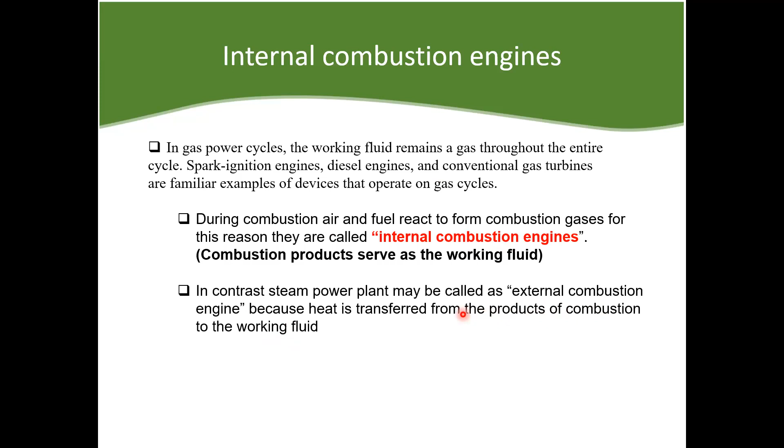What are examples of internal combustion engines? We have the two-stroke cycle and the Otto cycle, or the gasoline engines. For the two-stroke cycle, it's one power stroke for every two strokes, with the piston moving up and down. It's less efficient, and we commonly see this in motorcycles, chainsaws, and lawnmowers, where the engine is small.

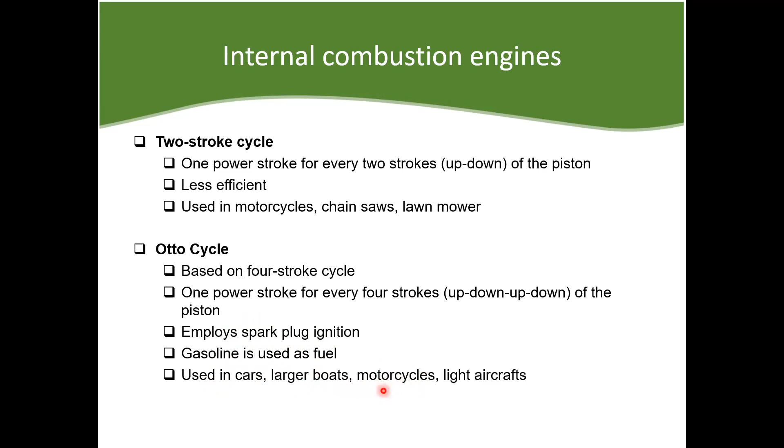On the other hand, the Otto cycle is based on a four-stroke cycle, so unlike the two-stroke, this time there's one power stroke for every four strokes. It uses a spark plug, a part you may have heard about in a gasoline car. Gasoline is used as fuel, and we commonly see this in cars, large boats, large motorcycles, and light aircrafts.

This is an ideal Otto cycle. By the way, when we're talking about an ideal Otto cycle or an ideal diesel engine, which we'll discuss later, we call that an air standard power cycle. This refers to the ideal counterpart or the ideal cycle. The cycle consists of four internally reversible processes. Let's look at the TS diagram and the PV diagram at the same time.

Steps 1 to 2 is the isentropic compression. Isentropic is a vertical line on the TS diagram. On the PV diagram, this is where isentropic 1 to 2 occurs. So the first step is isentropic compression. Air is the working fluid, and we assume that it's an ideal gas.

Step 2 to 3 is constant volume heat addition. On the TS diagram and PV diagram, since volume is on the x-axis, this is a vertical line. In the diagram, this is the step of constant volume heat addition, so the volume doesn't change. The piston remains at the same position, and we add heat.

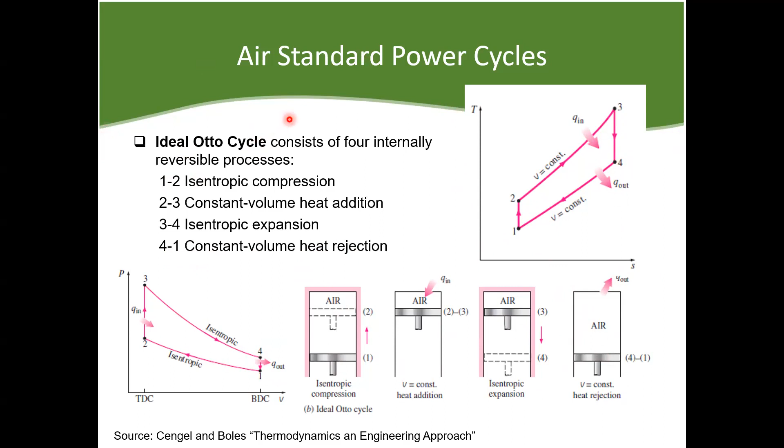So when we look at the thermal efficiency, by the way, this slide is from Ma'am Rowie's slide. Basahin nyo rin yung handout or slides ni Ma'am Rowie. May mga additional information doon na hindi makikita sa current slide. So credits to Ma'am Rowie for the slides.

Thermal efficiency of an air standard Otto cycle. Again, air standard Otto cycle, we're referring to the ideal Otto cycle. Remember our equation of the thermal efficiency: it's the work net over the QH, or the Q in, the heat absorbed or heat added to the system.

So we can adapt that in our Otto thermal efficiency equation. Remember, yung QH natin or yung heat addition, saan ba nangyayari? Saan step? Sa D to A, so step D to A in the diagram is the constant volume heat addition.

So we replace the denominator with Q sub DA, and our work net is actually Q DA plus QBC. But remember that yung QBC negative yung value niyan. So we just use positive, pero this itself would have a negative value kasi it's the heat that is rejected from the system, or going out the system. So the addition ng dalawa yan would compose the work net.

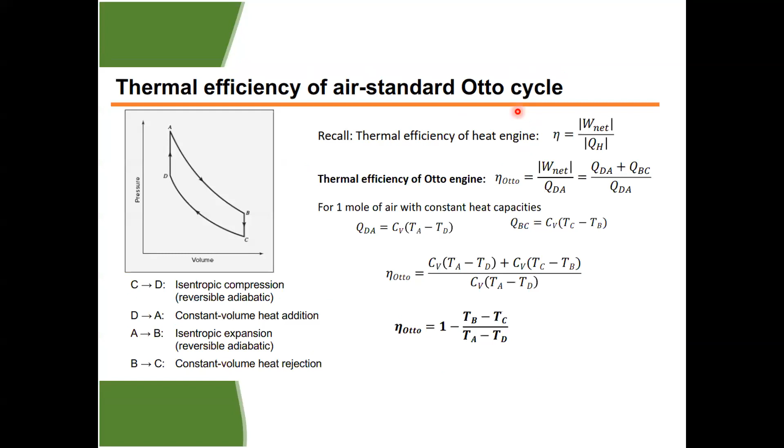And it's greater than 1 because VC is higher, so nasa numerator yung higher volume. So what if we want to express this in terms of the compression ratio? Let's derive the equation for that. Since our assumption is the air is an ideal gas, we can use the ideal gas equation.

We substitute yung expressions ng T into the equation. So substitute mo yan, substitute mo yung TC, and so on and so forth. Simplify the equation. Since this is our compression, we define this term VC over VD as our compression ratio. Substitute lang yung R. Now itong term, let's focus on this term, itong mga pressure na term na to.

Remember that may two adiabatic reversible steps. And for a closed system that's adiabatic, this holds true: PV raised to gamma is constant, where gamma is the ratio of the specific heat at constant pressure and constant volume. Remember that's from ChE 142. So adiabatic and reversible closed system, PV raised to gamma is constant.

So therefore, PA times VA raised to gamma is constant. And because VD is equal to VA, I replace VA dito with VD. The same goes for this term.

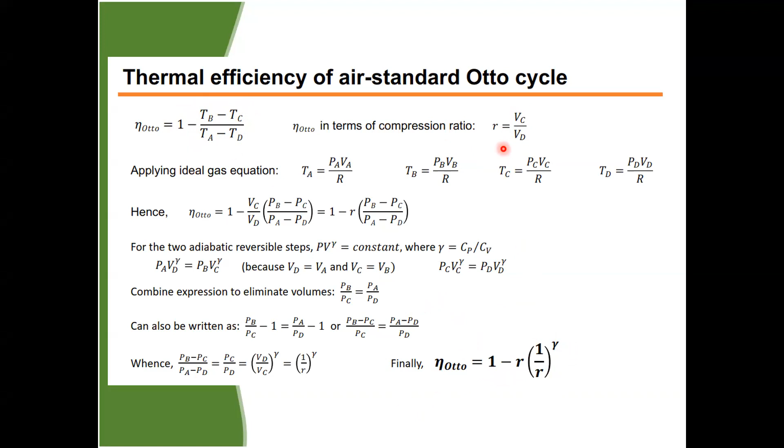So what is the significance of the compression ratio? The higher the compression ratio, the higher the efficiency, as shown in the figure. But when a higher compression ratio is used, the temperature of the air-fuel mixture may rise above the auto-ignition temperature. So what is the auto-ignition temperature? It's the temperature wherein your fluid automatically ignites, without needing a spark, it will ignite on its own.

And this happens during the compression process. In an actual Otto cycle, there's a spark plug, right? But if the temperature is too high, the spark plug isn't needed, it auto-ignites. And that phenomenon is called engine knocking or engine knock. I'm not sure if you've experienced this, probably in old cars, but engine knock in spark ignition engines cannot be tolerated because it hurts the performance and can cause engine damage.

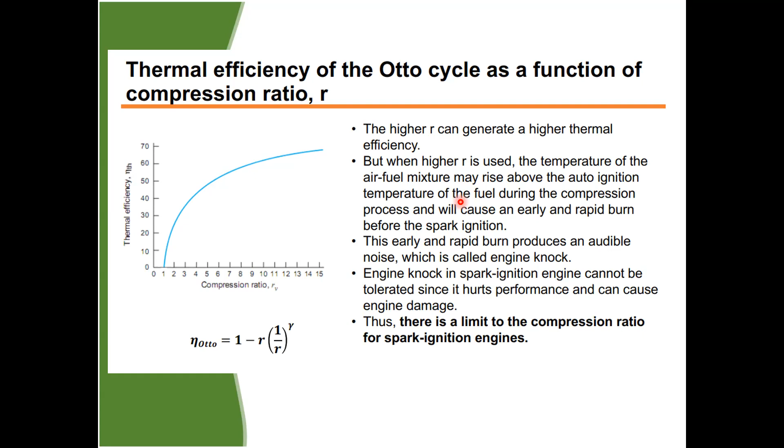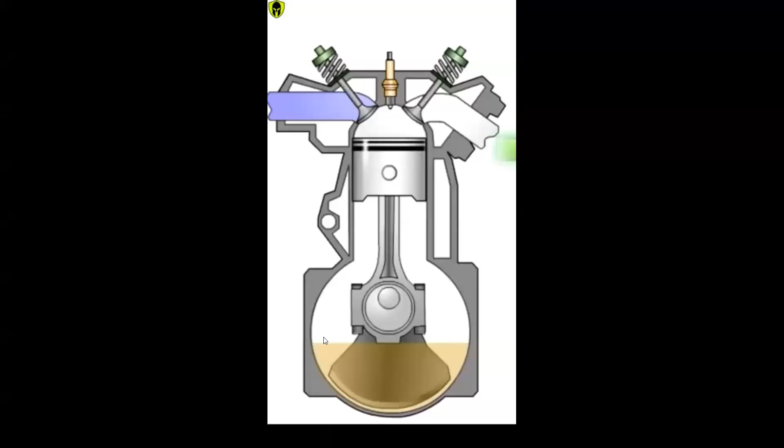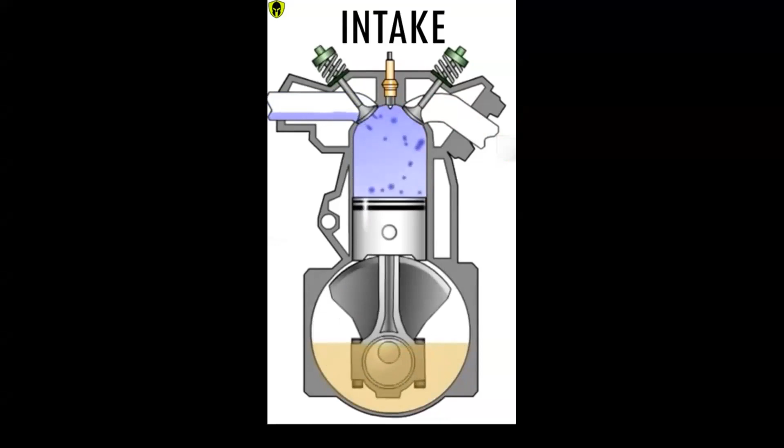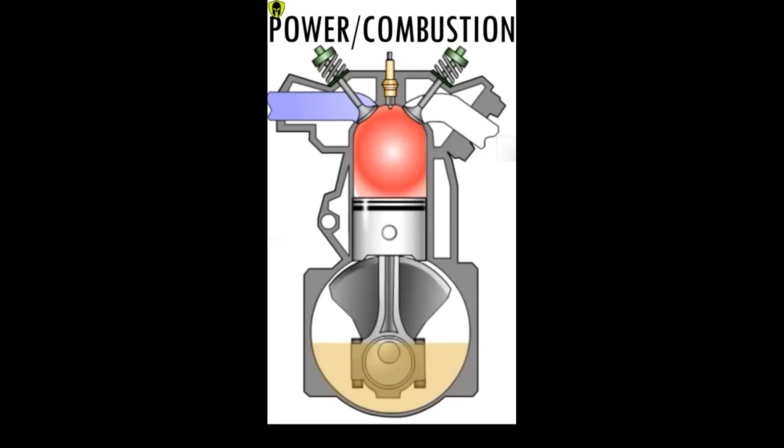How do car engines work? The internal combustion engine uses small controlled explosions inside the combustion chamber which push the piston down. The piston's reciprocating movement rotates the crankshaft to power the vehicle. All modern engines are 4-stroke: intake, compression, power and exhaust. During the intake stroke, the piston moves down, and at the same time the intake valve opens and the air and fuel mixture rushes into the chamber. Next is compression, in which the piston moves back and the intake valve closes, compressing the air and fuel mixture. Then comes the power stroke, in which the compressed air and fuel mixture is ignited using a spark plug, resulting in a controlled explosion that pushes down the piston with force. The last stage is the exhaust stroke, at which the exhaust valve opens and all the burned exhaust gas exits the chamber. The intake and exhaust valves are controlled by camshafts.

The camshaft is connected to the crankshaft. This whole process happens thousands of times in a minute.

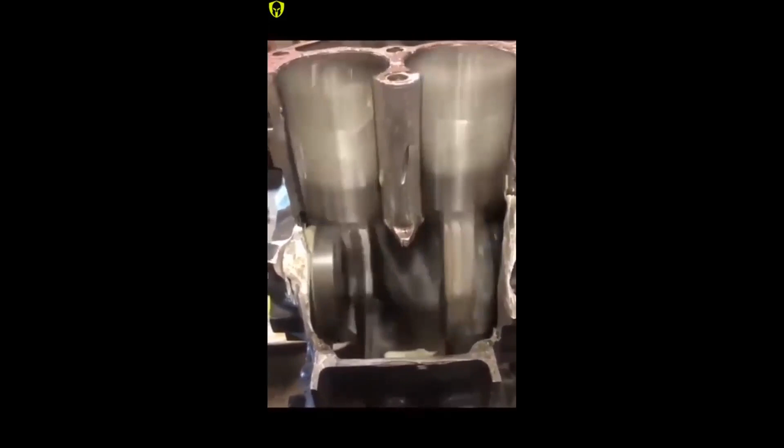So that's how an actual Otto cycle or Otto engine works. Let's proceed.

Next we move on to the diesel cycle. The ideal diesel cycle is also an air standard power cycle, like the Otto cycle. It's based on a four-stroke cycle and employs a compression heating ignition system. In gasoline engines, we have a spark plug, but in diesel engines it's replaced by fuel injection, and only air is compressed during the compression process. Diesel engines are used in automobiles, heavy trucks, heavy equipment, and electric generating plants.

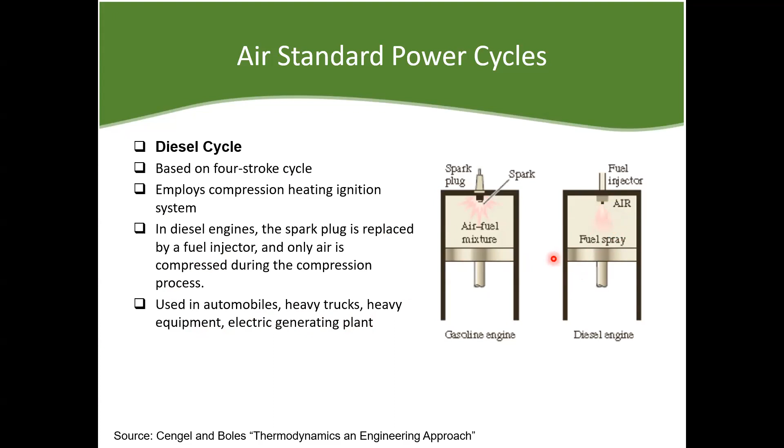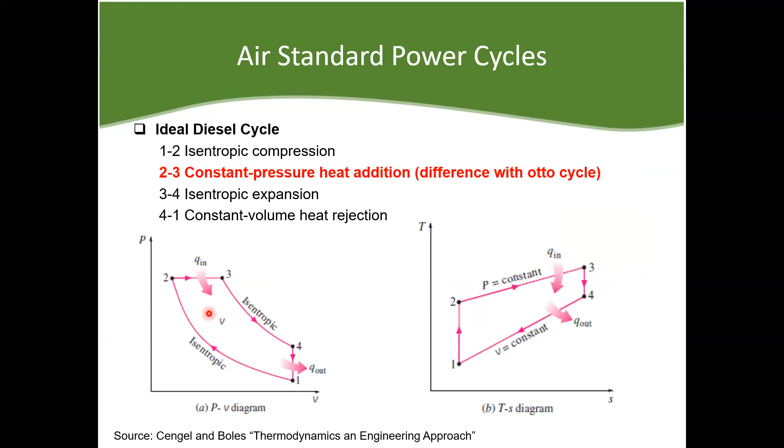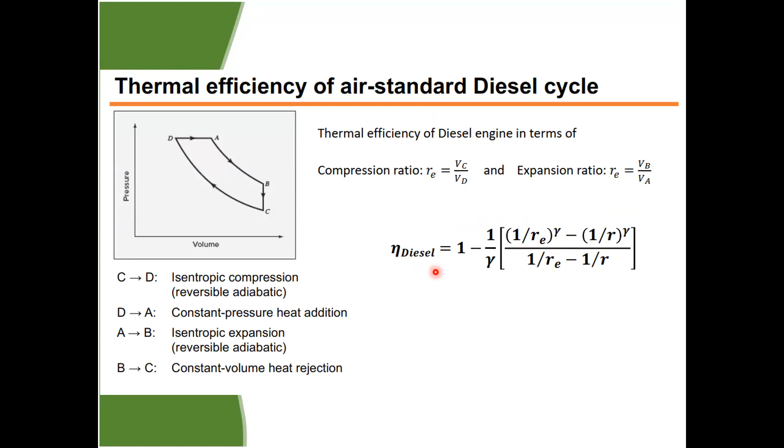And the efficiency of the ideal diesel cycle, or the air standard diesel cycle, is given by this equation. Again, assuming CP over CV is equal to gamma, and PV raised to gamma is constant, or the specific heats are not a function of temperature.

Before solving sample problems, let's finish the discussion first - the sample problems will be in a different video. Now we move on to the Brayton cycle.

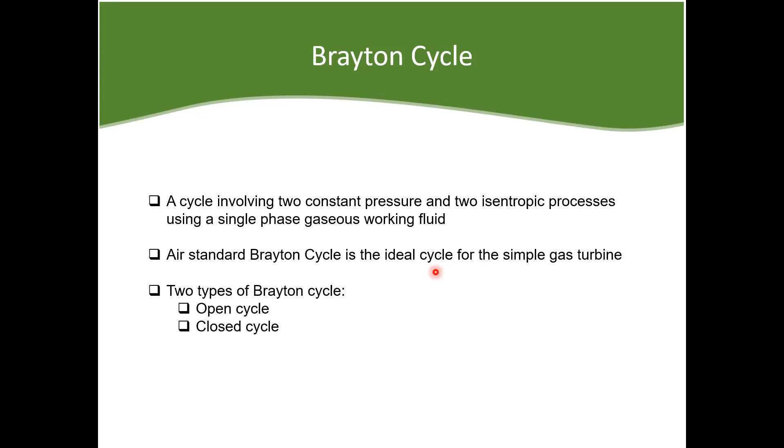It was previously called gas turbine engine, and it has three components: a gas compressor, a burner, and an expansion turbine. The cycle involves two constant pressure and two isentropic processes using a single-phase gaseous working fluid. We're still discussing a single-phase gaseous working fluid, whereas previously, in steam power plants, the fluid changes phase.

So the air standard Brayton cycle is the ideal Brayton cycle. Again, the term air standard refers to the ideal cycle. There are two types of Brayton cycles: the open cycle and the closed cycle.

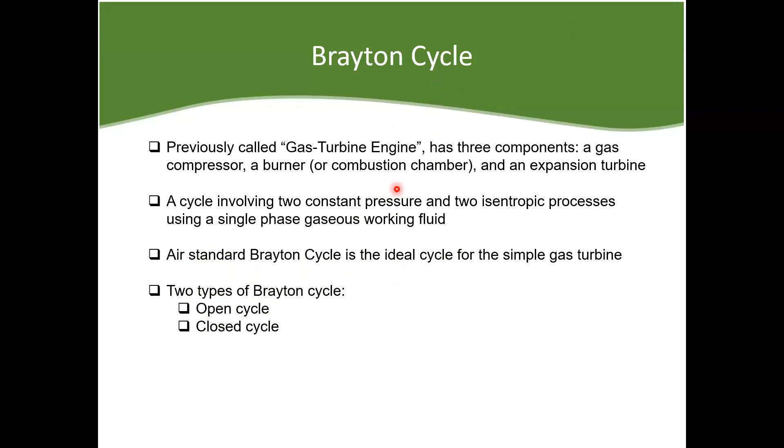First, let's discuss the Brayton open cycle. Fresh air at ambient condition is drawn to the compressor where its temperature and pressure are raised, and then the high pressure air proceeds into the combustion chamber with fuel, and the fuel is burned at constant pressure. The resulting high temperature gases enter the turbine where they expand to atmospheric pressure while producing power, or work. The exhaust gases leave the turbine and are not recirculated. Some part of the work of the turbine drives the compressor.

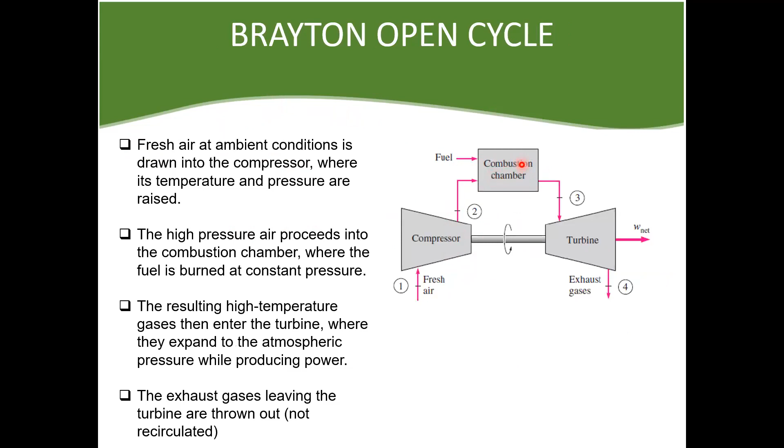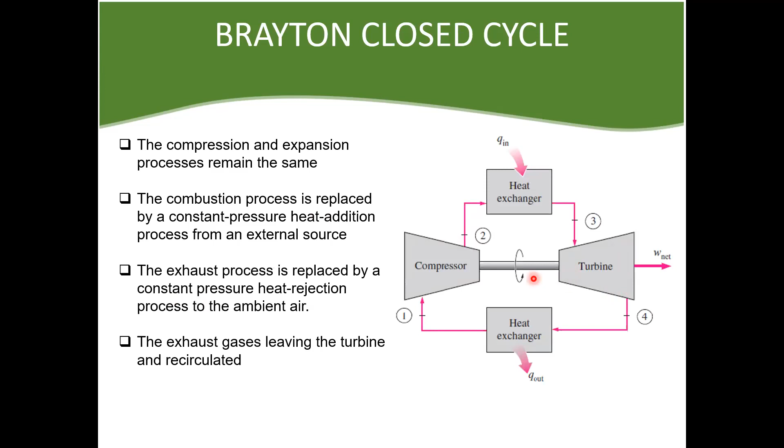On the other hand, for the Brayton closed cycle, the compression and expansion processes remain the same, but the combustion process is replaced by constant pressure heat addition from an external source - previously it was the air itself entering the compressor that was mixed with fuel. For this one, there's just a heat exchanger as the external source. Then the exhaust process is replaced by constant pressure heat rejection to ambient air, so there's a heat exchanger here too. The exhaust gases are recirculated, and again part of the work produced by the turbine is used to drive the compressor.

So if we want to calculate the efficiency of the Brayton closed cycle, we can use this equation. We start with the efficiency equation, 1 minus QC over QH, where QC is the heat rejected from the heat exchanger after the exhaust, and QH is the heat added in the heat exchanger after compression. Remember, both heat exchangers are constant pressure processes.

So this equation holds true: Q equals Cp delta T, where Cp is the constant pressure specific heat. We simply replace that with Cp delta T for both steps, then cancel out the Cp and rearrange, taking out T1 for the numerator and T2 for the denominator.

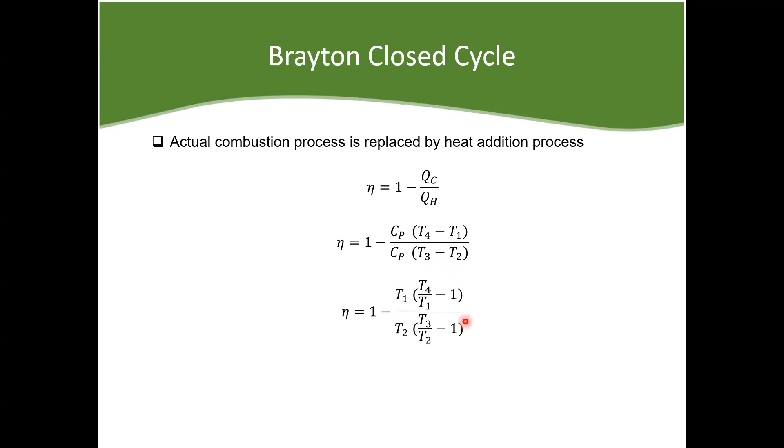Since process 1 to 2 and 3 to 4 are isentropic, refer to the TS diagram and PV diagram. P2 is equal to P3, and P4 is equal to P1. This is for the Brayton closed cycle, and this equation holds true.

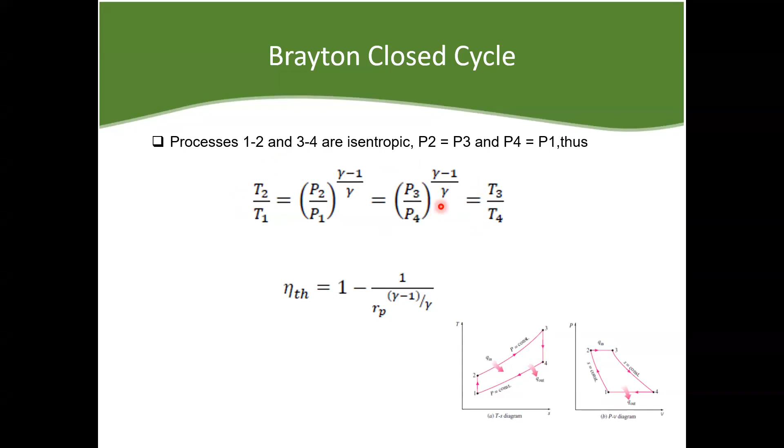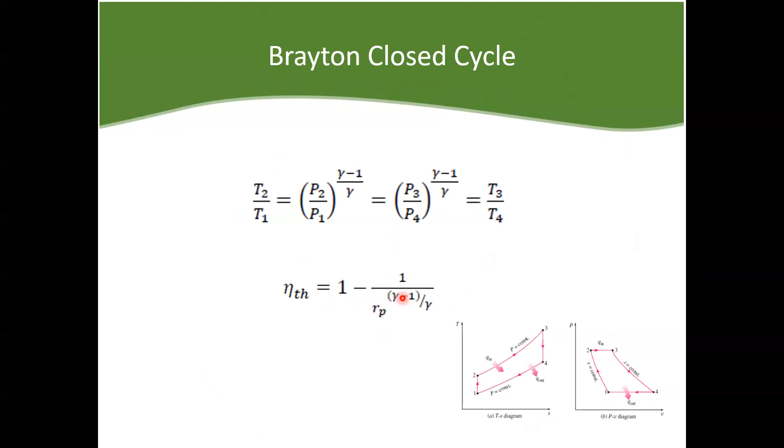Replacing the terms in our previous equation, we can then derive the equation for the efficiency of an ideal Brayton closed cycle. So this is the equation for the ideal Brayton closed cycle.

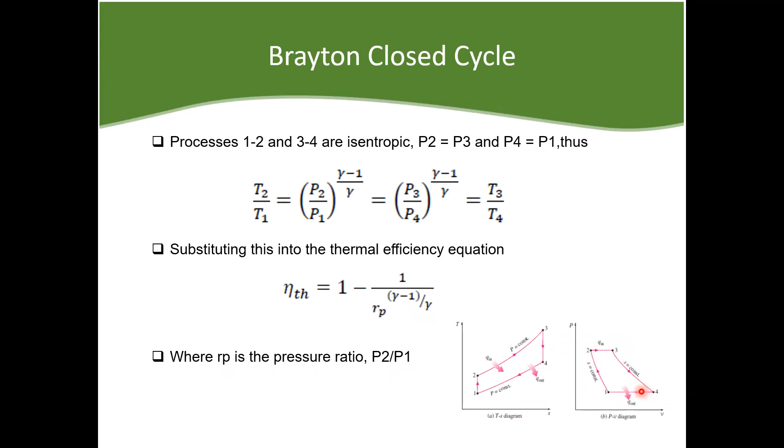Now the term P2 over P1 is called the pressure ratio. So P2 over P1, or P3 over P4, since processes 1 to 4 and 2 to 3 are isobaric, constant pressure.

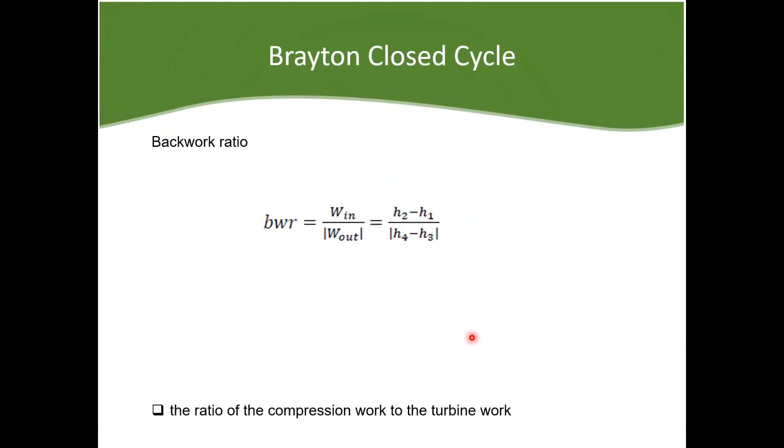We also have another term called the backwork ratio. What's the backwork ratio? It's the ratio of the compression work to the turbine work. Remember, in the Brayton closed cycle, part of the work of the turbine is used to drive the compressor. So we take the ratio of the work required by the compressor over the work produced by the turbine. Expressing that in terms of enthalpy, we have the backwork ratio. The usual range of the backwork ratio is 40 to 80% for the Brayton closed cycle.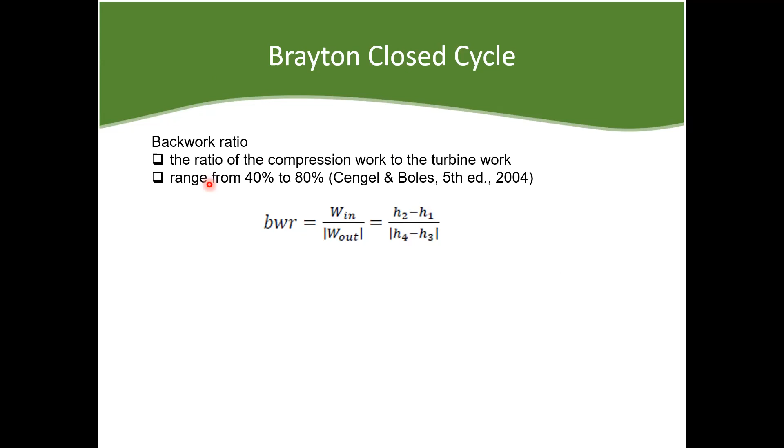Okay, we're done with the internal combustion engines and the Brayton cycle. Let's discuss jet engines.

In our previous discussion on steam power plants, gas turbines, Otto and diesel engines, remember that the power becomes available through a rotating shaft that drives the motor for power generation. But in jet engines, expansion is done through nozzles. Power is available as kinetic energy from the jet of exhaust leaving the nozzle. Jet engines are used to power aircrafts.

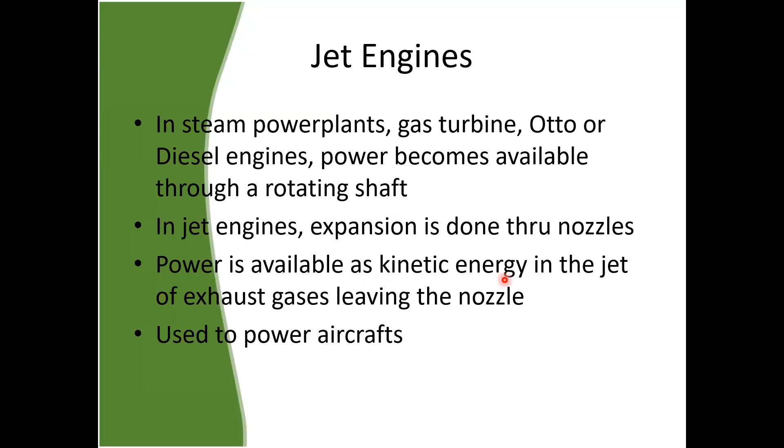This is a schematic diagram of a turbojet power plant, or jet engine. Air enters the chamber, there's a diffuser, then a compressor, and combustion happens here. There's a turbine, and the unique part for jet engines is the nozzle, where the kinetic energy of the exhaust gas leaving the nozzle is the source of the power. So this is the turbojet engine.

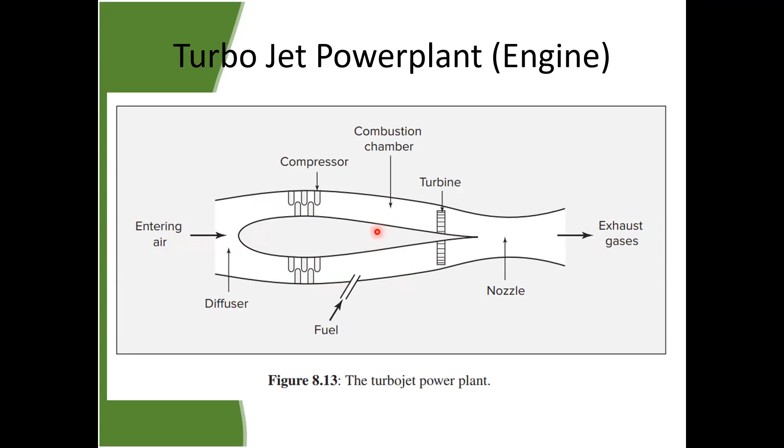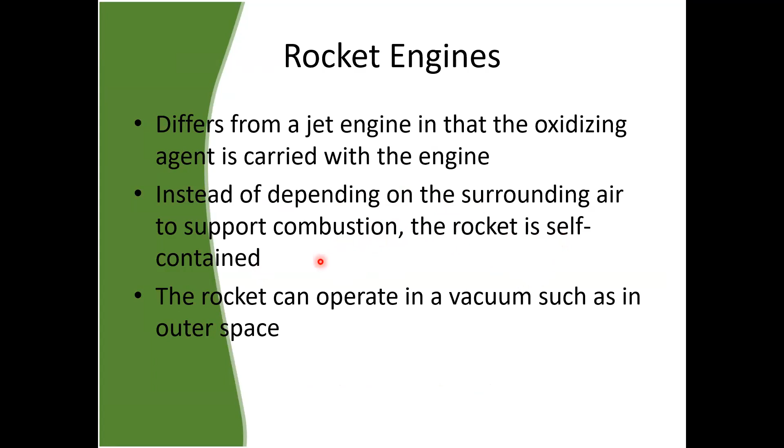On the other hand, rocket engines differ from jet engines because the oxidizing agent is carried with the engine. In jet engines, the oxidizing agent is the air, the oxygen, which is needed for combustion. But for rocket engines, since they're used in outer space where there's vacuum and no air, rocket engines carry the oxidizing agent within the engine. So instead of depending on the surrounding air for combustion, the rocket is self-contained, since it has to operate in vacuum, such as in outer space.

Okay, everybody, that ends the lecture. We will now move on to the sample problems in the next video.